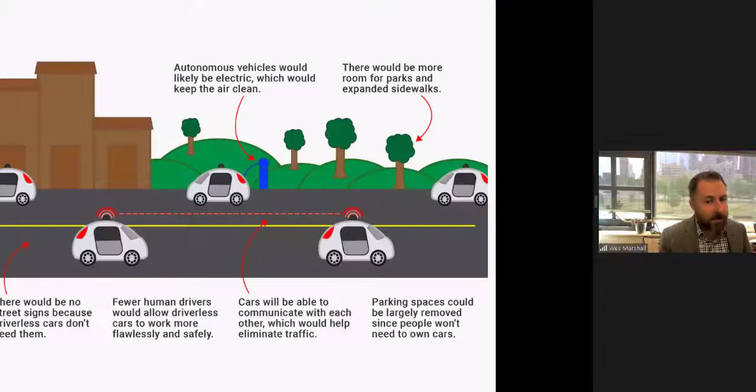But we sort of treat these deaths as the cost of doing business as opposed to the public health issue that it is. So engineers will lay out a lot of these problems, like the traffic congestion and the infrastructure, and they say, well, how are we going to fix all this? One, give us some money - that's always a good start. The second is always technology. We sort of feel like things like autonomous cars or hyperloops are going to fix everything. When I say everything, I mean everything - it's going to help keep our air clean, get rid of parking, eliminate traffic. Everything's going to be safe. We're not even going to need street signs.

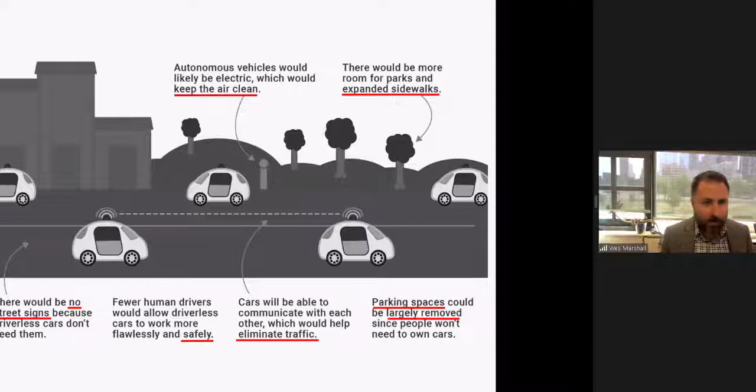So for me, that's sort of the context here. I have a hard time getting excited about spending trillions of dollars on all that technology when we can't even get our damn sidewalks right.

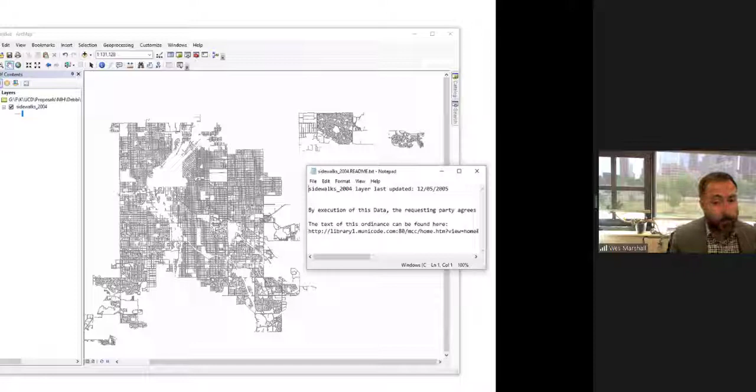When I asked somebody what's going on with the city, I was told that the city's lawyers told them they couldn't update this because if they knew there was a problem, they'd be liable. So it's not like we couldn't collect this data. It's that we were sticking our heads in the sand, or maybe down a manhole.

But that doesn't work. What we found out is that cities were getting sued regardless of their purposely trying to ignore this issue. And they were losing these lawsuits. I think cities were now beginning to realize that pretending not to know there's a problem is not going to work.

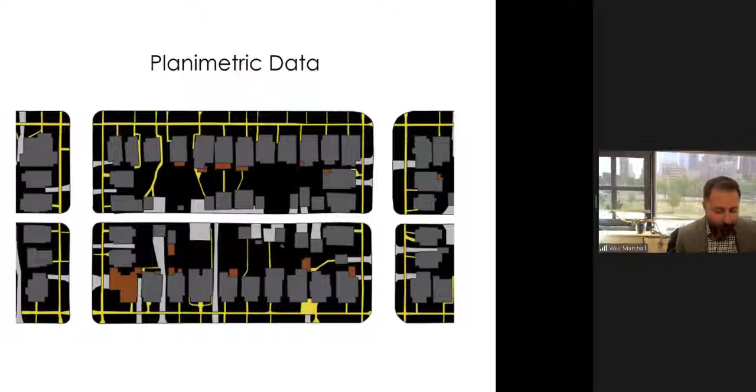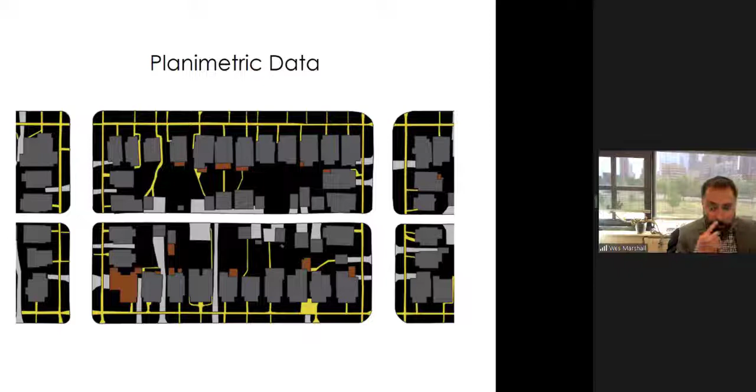I think it was fortunate timing to have Nick looking for a dissertation around that same time, because he was the perfect student to take on this challenge. He had just gotten his master's in GIS, and that skill set was really needed to do this. So as he was working towards his PhD in transportation engineering, I think you'll see when Nick presents how invaluable that skill set was.

Nick will tell you a little bit more about some of the existing research as well, but one of the initially shocking things for us was how little research there is out there on sidewalks. And of the research that is out there, most of it looks at a very limited area, like a single neighborhood, or the sidewalk data is compromised, so to say. They'll collect the sidewalk data from the inside of a moving car, using a clipboard. It was pretty wild to see what some of the researchers were doing to even collect sidewalk data.

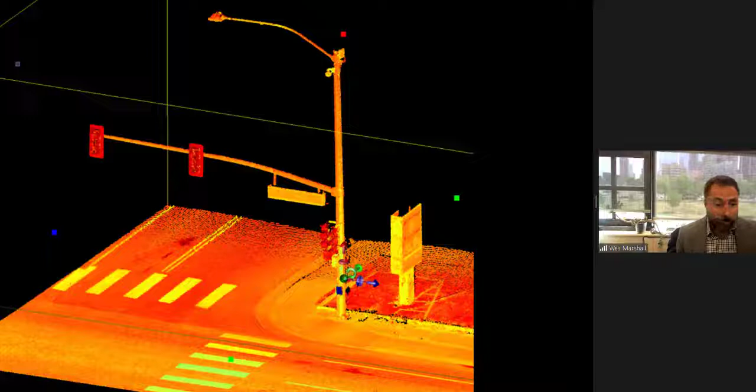This is rapidly changing though, so the data we're able to collect for this infrastructure is only going to get better and better. In the second MPC project we're talking about today, another PhD student of mine, Yaneev Golembeck, analyzed LiDAR data to see what we could see.

LiDAR stands for light detection and ranging, a remote sensing technology that uses pulsed lasers to measure range. The U.S. government started what was called the 3DEP program, the 3D elevation program, collecting a national LiDAR database. At the beginning it was called QL2, quality level 2. Yaneev wanted to figure out what we could see with this—could we start seeing things like sidewalks or other street furniture?

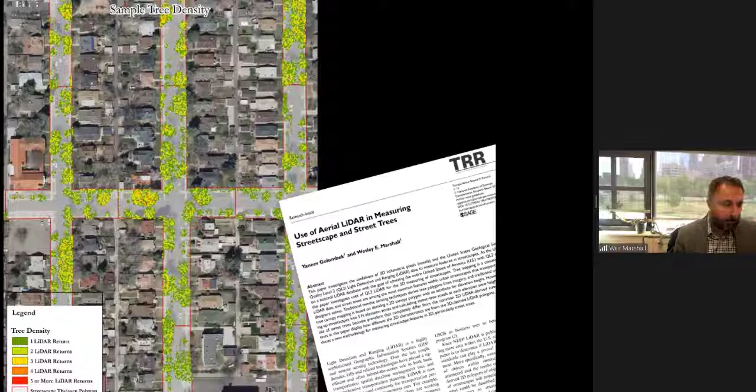At first, with that quality level 2 data, all we could really see were the trees and the buildings. Here you can see a group of trees embedded within this LiDAR point cloud, but we could measure those trees, and with this we could get things like the density of trees or how much tree canopy there was. We could start connecting it to road safety and understanding whether the clear zone type convention is actually leading to safer streets or not.

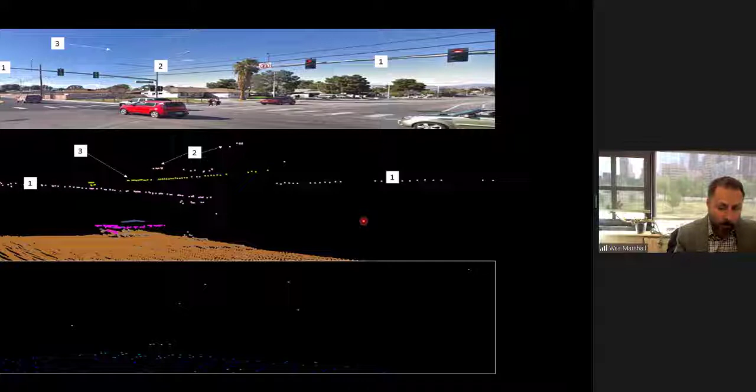Now not only can we make out the street trees and the buildings, but we could legitimately extract and statistically quantify things like fences or walls, any vegetation, light posts, traffic lights, power poles, power lines, street signs, and started getting into street furniture, benches and things like that. Sidewalks, though, were still a little bit elusive with this.

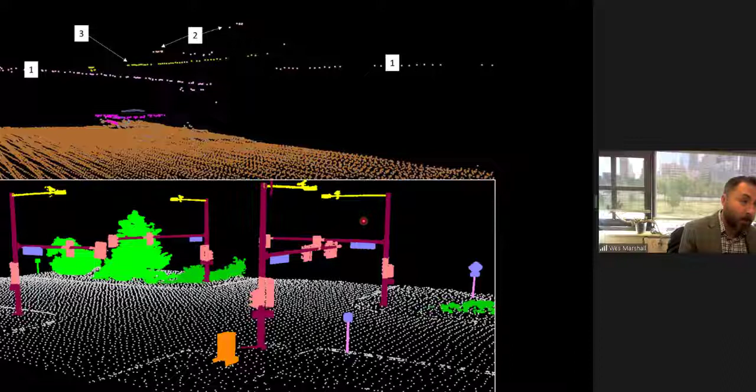But in the third paper that Yaneev and I did—this is the overview of almost his whole dissertation—was the mobile LiDAR. You can see here at the bottom, which is collecting thousands of points per square meter compared to the 8 per square meter with the QL1. Now we can see pretty much everything, including sidewalks. Here you see us identifying a traffic signal, stop sign, a pole, a fire hydrant.

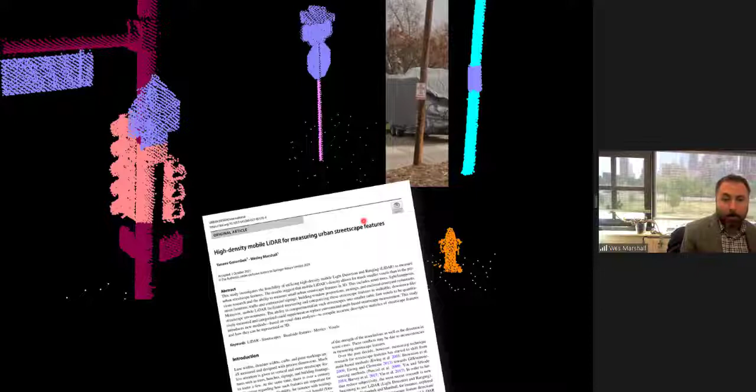As you can see here, we're starting to get into the sidewalk stuff. So it's not just for us whether the sidewalk exists or not, or even the width—that's the sort of basis we can get with the planimetric data that Nick will talk about.

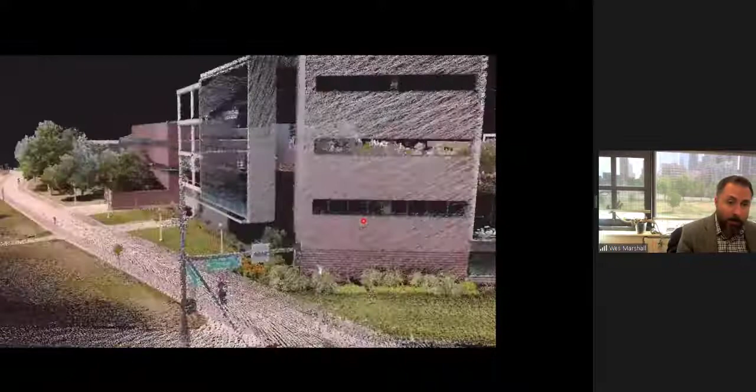With our next MPC project that we're working on now, we're looking to extract ADA information, the Americans with Disabilities Act - such as being able to see the quarter-inch lip on a sidewalk, which we can't get with planimetric data, but maybe we'll get in the next iteration of this work. This is some data we collected with a LiDAR mobile backpack, walking around a building on campus. That took about 15 minutes to collect.

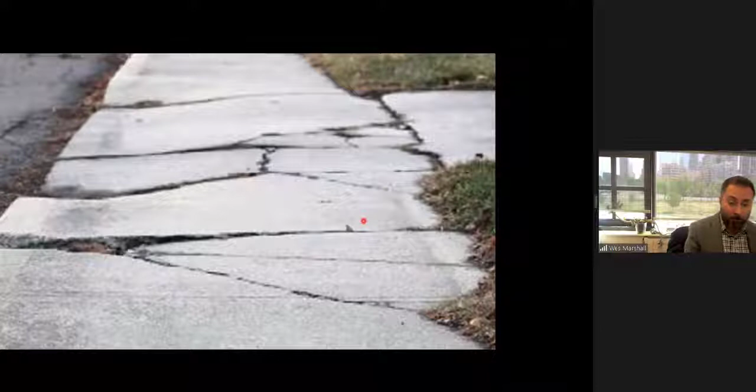For now, I have a hard time hearing people pine over autonomous cars and hyperloops when we're still failing at our most basic infrastructure: sidewalks. So that's what we're trying to do with this research - take a closer look at the humble sidewalk and start to think about how we do better.

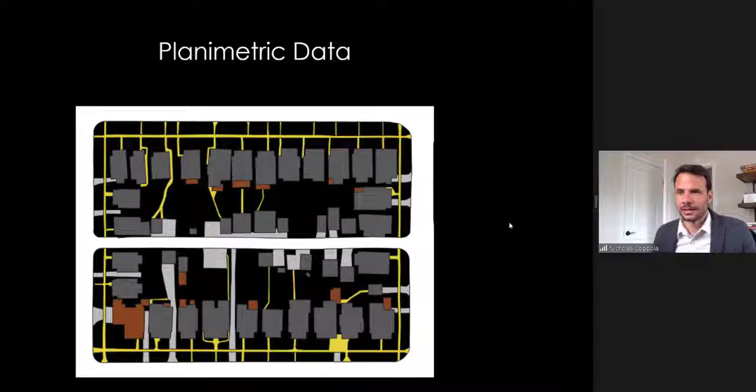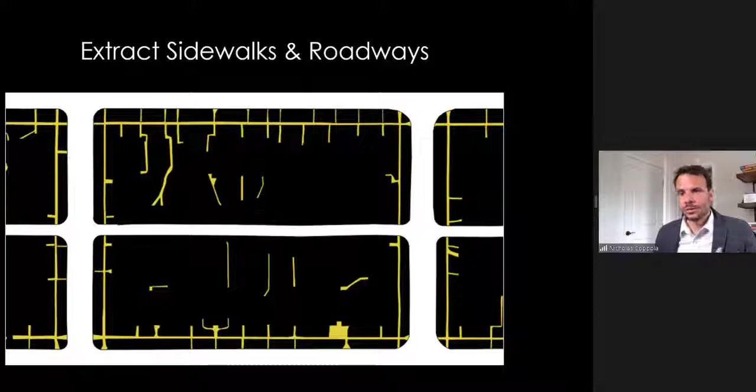To take a deeper dive into what this looks like, this would be an example of planimetric data. You have your buildings, sidewalks, and roads, similar to what we showed in that earlier picture. What we had to do was normalize that data - find a way to make it the same for every city. So we would extract the sidewalks and roads, and then use parcel data sets so we could limit it to being within the public right-of-way. This is based on conversations we had with multiple cities across the United States. This is their approach, using the parcel data set to help normalize that data and limit it to within the public right-of-way.

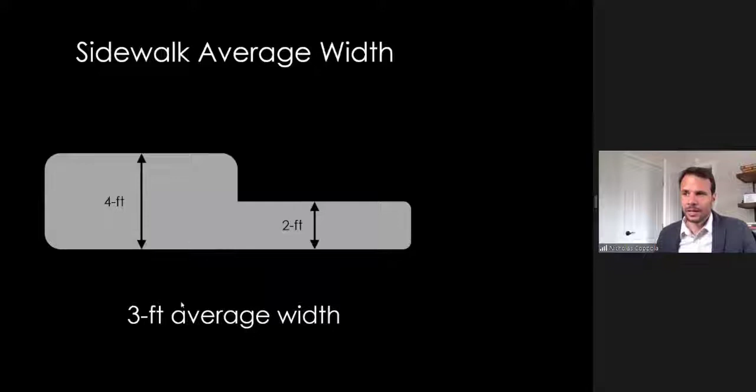What we wanted to look for, we wanted to keep pretty straightforward: sidewalk availability. If you have sidewalks on both sides of the road, you have 100% availability, and if you only had sidewalks on half, then you have 50%. Keeping it pretty simple. Next we look at sidewalk average width - so if you had a sidewalk polygon that had 4 foot and 2 foot of equal length, you'd have 3 foot average width. We also looked for sidewalk minimum width, which pretty much speaks for itself.

You want to find that pinch point—what is the narrowest section of that sidewalk polygon within that data set. Here it would be 2 foot.

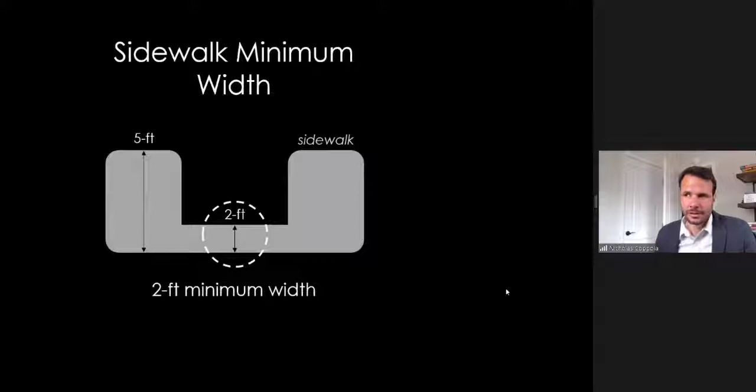Now the sidewalk width is helpful, but we need to compare that against something. So what we did was take a look at the Americans with Disabilities Act, which is a standard. The ADA is a law, so this is sort of like the gold standard of the 3 foot mark.

The ADA has proposed moving that to 4 foot, but this has not been enacted into law yet. So we took a look at the 3 foot and the 4 foot to start with. Beyond that, we looked at other agencies and their guidelines, such as AASHTO and FHWA, and that essentially ended up breaking it into 3, 4, 5, and 6 foot thresholds for what we were looking at.

In addition to the width, we also took a look at land coverage. By land coverage, what we mean is the relative comparison of sidewalk area of coverage within the right-of-way compared to roadway land coverage within the right-of-way.

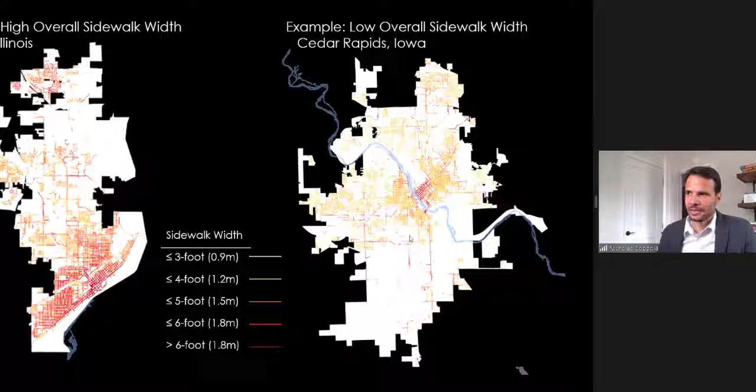So this is an example of some of the results that we found. On the left, you'll see Peoria, where there's a high overall sidewalk width, which is very easily noticeable based on the symbology shown here in the colors, as opposed to Cedar Rapids, where you can see a significant difference in sidewalk availability and sidewalk width.

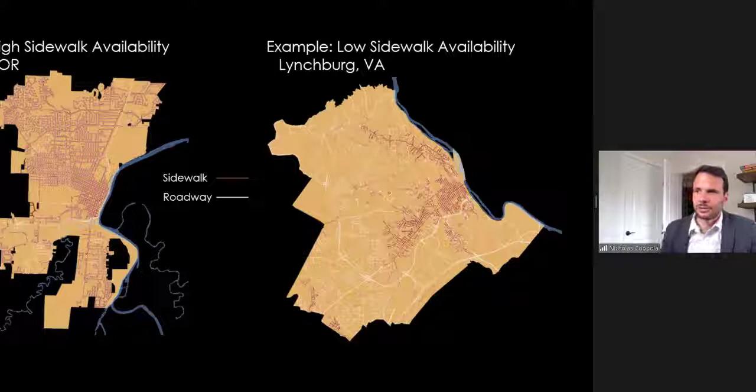And then on the other side, when we looked at sidewalk availability, this is very easily noticeable. You can see a considerable number of sidewalks in Corvallis compared to in Lynchburg.

So what does this actually look like in terms of what the results are telling us? What it looks like is that we have a deficiency in sidewalk availability based on those cities that we took a look at.

More specifically, that comes down to about 50% sidewalk availability. When you think about that, it would mean you have a sidewalk on one side of the road but not on the other. That can be a pretty dangerous scenario, especially for people with disabilities who may have a harder time getting around. We also found that just over 10% of these sidewalks failed to meet ADA compliance at 3 feet.

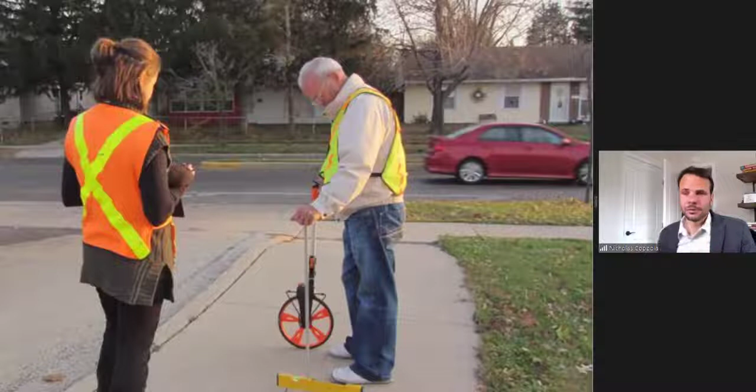Coming back to the main point here, what we found is that the traditional methods of having to go to the field and collect this data manually would take an insane amount of time, almost not even be feasible when you think about cities like Boston or New York City. What we found is that we can supplement this—we can work with that, and now we can make use of data, we can make use of advances in spatial data, and we can contribute to this. We're capable of doing that, and that's what this first component of the research shows.

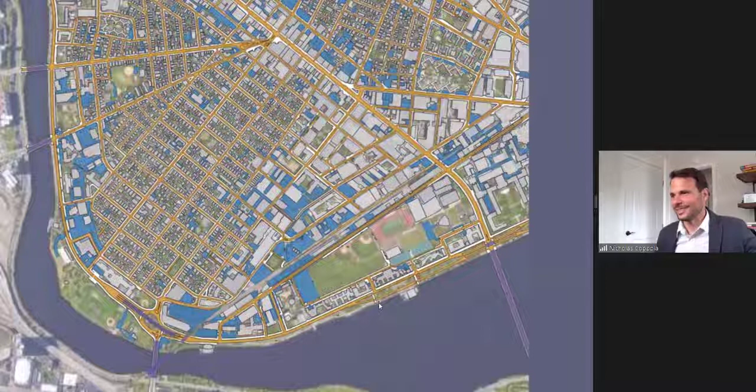So we took a look at Cambridge, Massachusetts. We found with a little more research and digging, Cambridge had some excellent data. Taking a closer look at what their data looked like, as an example, this is what planimetric data would look like for sidewalks before including obstructions—this is kind of what you would typically get.

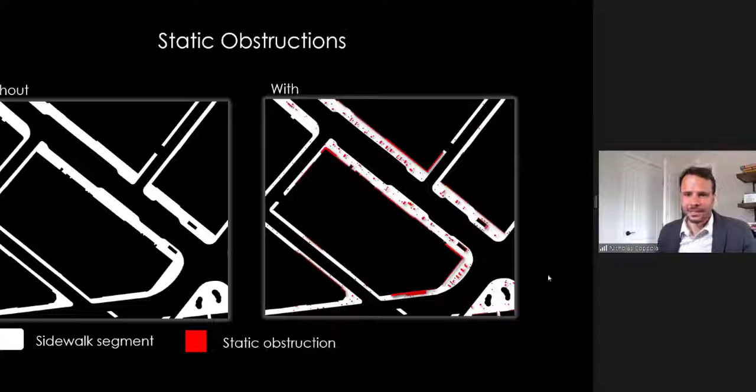Almost looks perfect, right? But when you start adding static obstructions, this is a completely different scenario. Your sidewalk doesn't look anything like it did originally. So let's take an even closer look at what that looks like as an example.

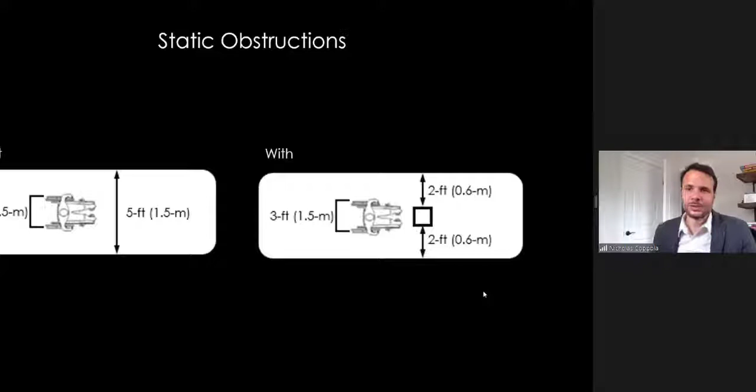With one of these sidewalk polygons that's being collected, if that sidewalk polygon shows that you have 5 feet of width, that sounds great. As a city, state, or county looking at this, you're thinking this is fantastic, 5 foot width, easily accessible. But then when you include static obstructions, all of that goes away. Now you realize you only have 2 feet around that obstruction for somebody to get around, and that isn't accessible. That's not ADA accessible.

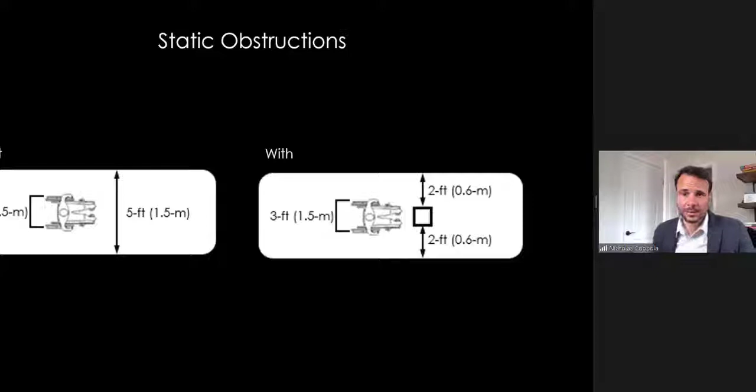So we've realized that static obstructions bring a completely different ballgame to this. When we say static obstructions, we looked at 18 different static obstructions based on the data available to us. For example, you have trees, benches, lighting, fixed garbage cans in place. In total, there were over 30,000 of these features throughout Cambridge.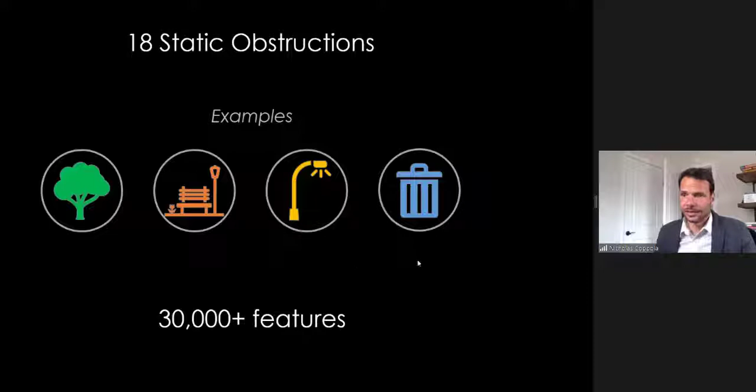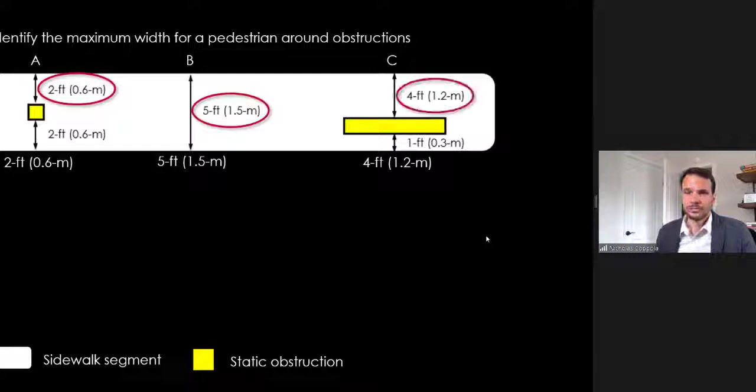So the first thing we did was identify what the maximum width would be for a pedestrian going around obstacles, and in this case it would be 5 feet. Then we looked at what the minimum width would be, that pinch point if they actually wanted to navigate this sidewalk with these obstructions. What we found was that it goes from 5 foot to realistically being 2 foot. That's a considerable difference compared to without obstructions versus when you incorporate those obstructions.

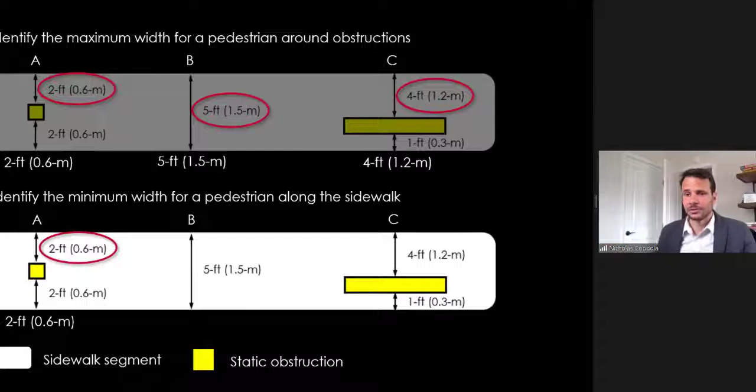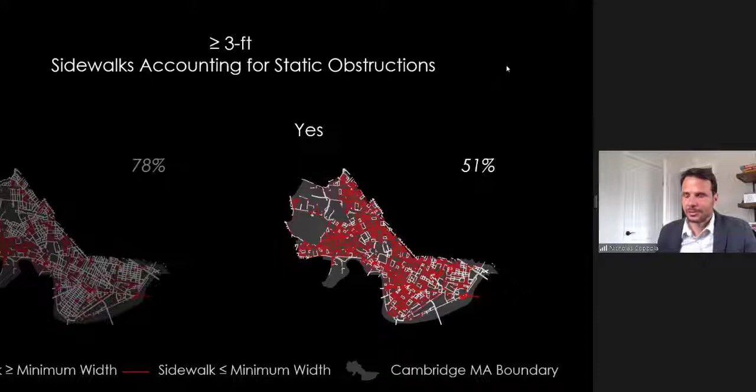So the results show us that the number of compliant sidewalks can be cut nearly in half, which is considerably different. If we didn't have static obstructions, that's what the maps on the left will show you. So when we're looking at 3 foot, you would have 78% compliance. And when we did introduce static obstructions, which is this image on the right, it's only 51%.

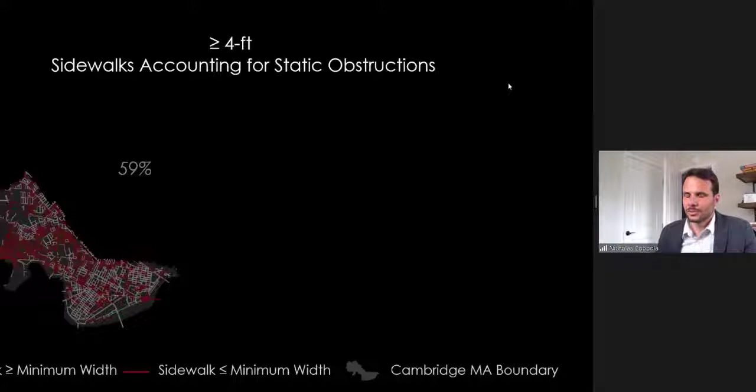That's a 34% difference. And we went through this for each one of those benchmarks: 3 foot, 4 foot, 5 foot, and 6 foot. At 4 foot, without introducing obstructions, it was 59% compliance, and with obstructions, 31% compliance, a 48% difference. At 5 foot, we went from 36% down to 18%, essentially a 49%, just about 50% difference. And then at 6 foot, we went from 17% compliance down to 11%.

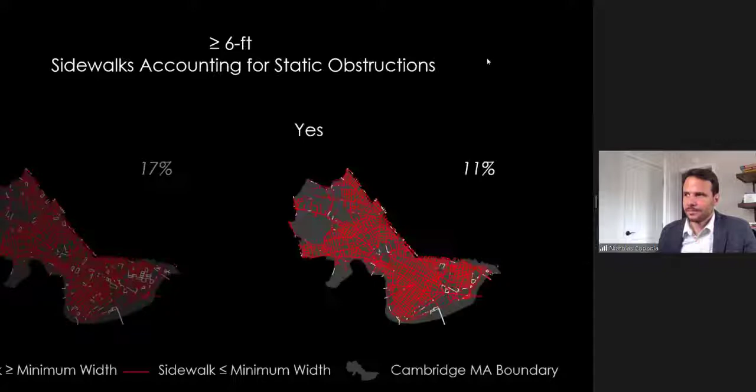So before moving on to this next section, I want to point out that data sets don't typically provide that level of detail for planimetric data. That was an anomaly in a sense, but it tunes you into the fact that even though planimetric data helps us move to that next stage and gives us more information from the data available, we could still do better. That shows reasons why we still need to do better.

So the next paper we looked at was the unequal distribution of sidewalk infrastructure across 16 U.S. cities. Typically in cities, this looks a lot like some of the pictures we've already seen. This is what a quote-unquote sidewalk would look like. It's really not a sidewalk. They don't exist, or they're too narrow, or they lead to absolutely nothing, maybe one building.

So the question we had was, which populations are most impacted by this? It's important to take a step back and realize what we're aiming for here is research and analysis on the equality of the distribution. How equally are sidewalks being distributed throughout a city? By understanding how equally those sidewalks are being distributed, it gives us more insight to equity and understanding how that can impact different demographics.